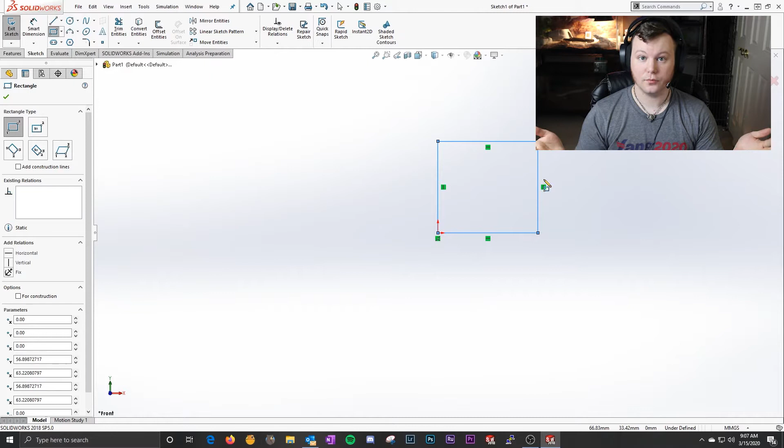First I'm going to start with the LED and heatsink. Just going to measure the heatsink, the LED position, and then put it back on. So, got my calipers.

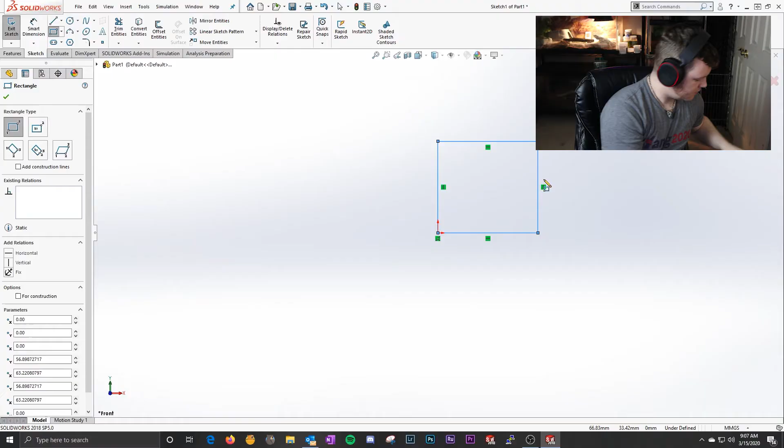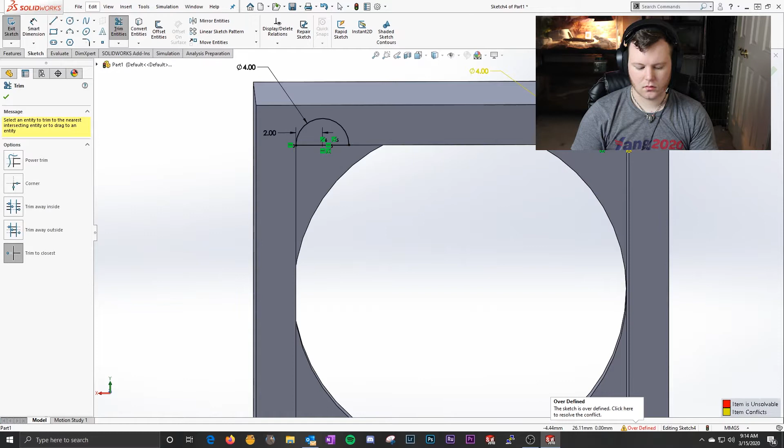Just put on lo-fi hip-hop beats to study chill to. That's what I'm thinking in my head right now. Yes, I know it's over-constrained. Chill out.

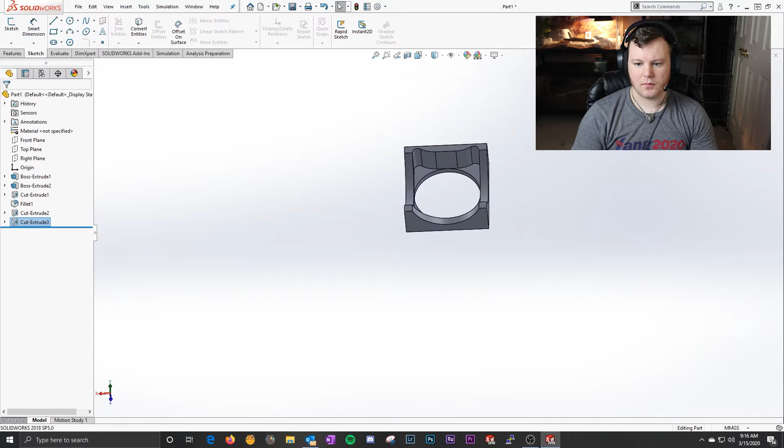Okay, so that's the part that will house the heatsink and the LED. I put these two cutouts right here because the wires for the LED have to come down.

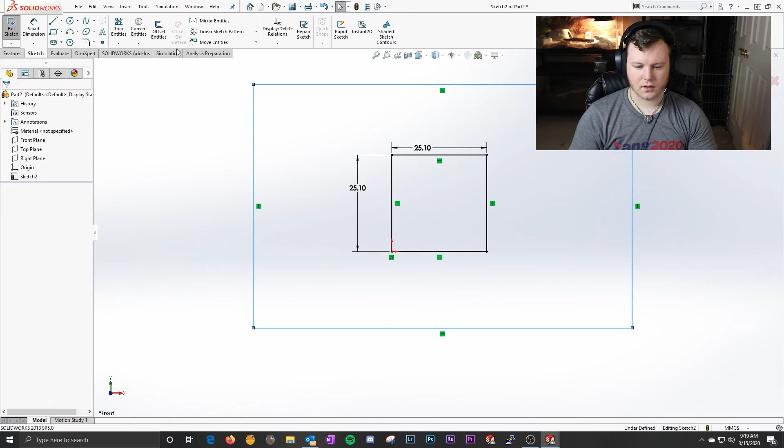Excuse me. Okay. A lot of it depends on whether or not you care if the battery's exposed, so if you want to be able to just pop it out and pop a new one in. I think I'm gonna make mine with the battery exposed. I'll show you what you can do if you don't want to have the battery exposed. But if you have it exposed, you can also use it as just an 18650 charging circuit, and you can just use it to charge batteries too, which might be handy.

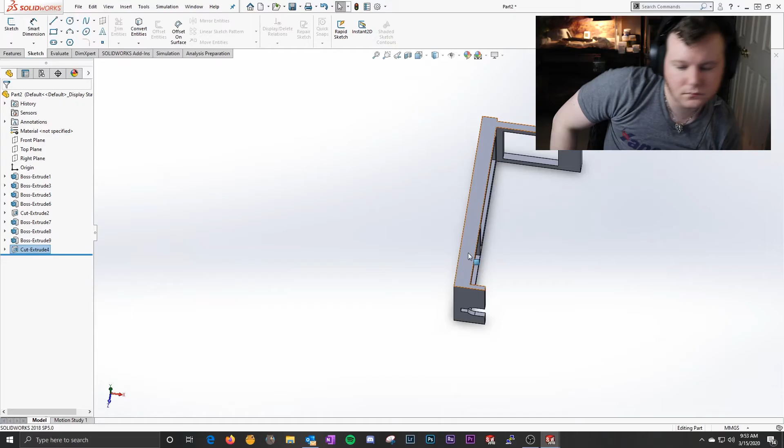Okay, now that I'm done with the design of the housing, I'm going to show you how I go 3D print it. That way you can replicate it and make it easiest to print and then take the supports off and stuff. If you're familiar with 3D printing, you can just skip to the end of the video at this point, but if you just want some tips, then feel free to keep watching.

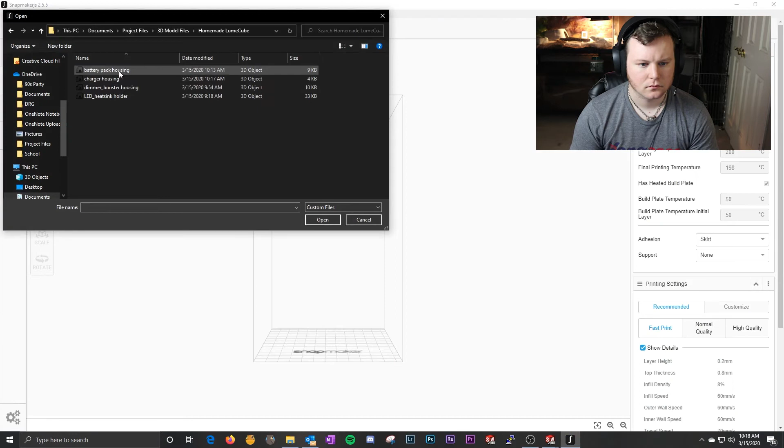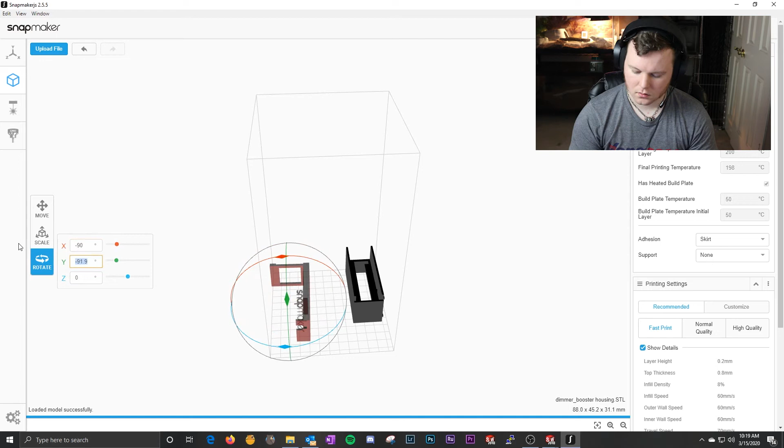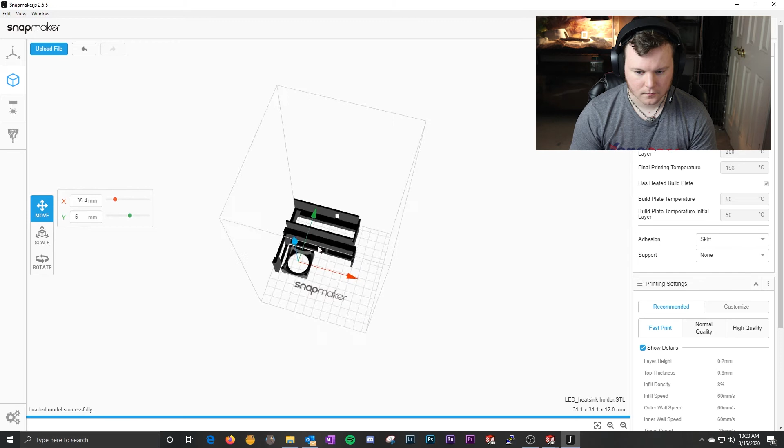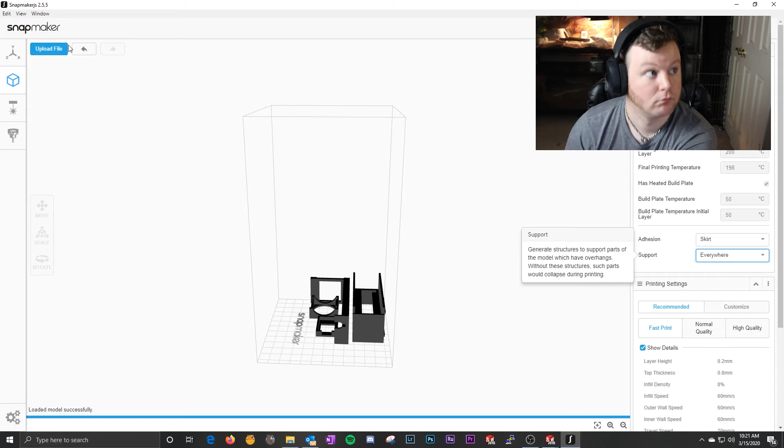I'm going to put supports everywhere, so with that in mind, these are the orientations that I'm doing. Okay. So it's adhesion skirt, touch build plate. Oh no, I want everywhere. 5 hours, 39 minutes.

Alright, so I'm going to put all these files on Thingiverse as soon as I print them out and verify that they work, and then I'll be uploading this video and you guys can follow along.

So hope my quiet whispery voice wasn't too creepy. But yeah, that's how I design my housing. I hope you learned something or found it valuable.